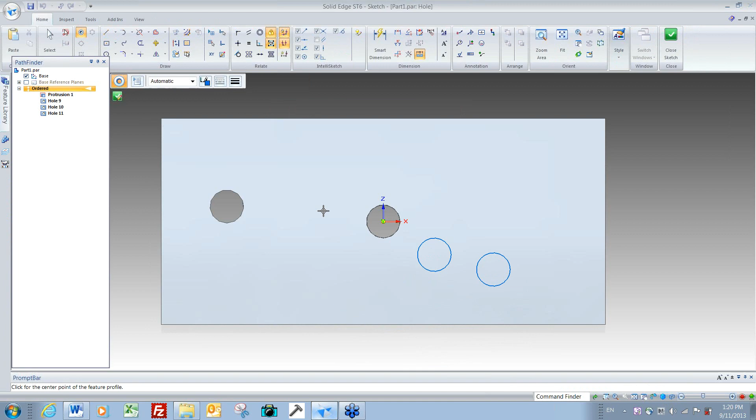Now your users today can do this. They can save, like this is a simple 1.0 hole, but it saves it locally into their custom.xml file. I'll show you what that means in a minute. Let me just commit this hole. So what that buys you is that when your user wants to create a hole again, that user can fly this down and there's that simple hole right there. But it's only localized for this user.

So if I go back to the C drive, Program Files, Solid Edge ST6, and Preferences, my local time is 1:20 p.m., and you can see that the custom.xml file has been modified. And if we look inside, you'll see that simple hole that I created.

I think it usually puts it at the bottom of the list. Again, there it is right there, simple 1.0 hole. So this is being maintained so that these holes can be remembered for the user. But again, this is local on this one user's computer, so no one else can really share that file.

And it works great for the local user because then they can come back and pull that same file. But if lots of different people are using this same type of file, they're creating the same hole over and over again, and it could be done on the network so that everybody shares the same definition.

So let's simulate how that can work in your controlled environment, in your Solid Edge administration. I'm going to go ahead and restart the administrator. Again, I'm getting the message saying that I'm using the local options.xml file. And I'm going to open my network version. This is the one that I just made a copy of onto my network. Now I'm working with the network options.xml.

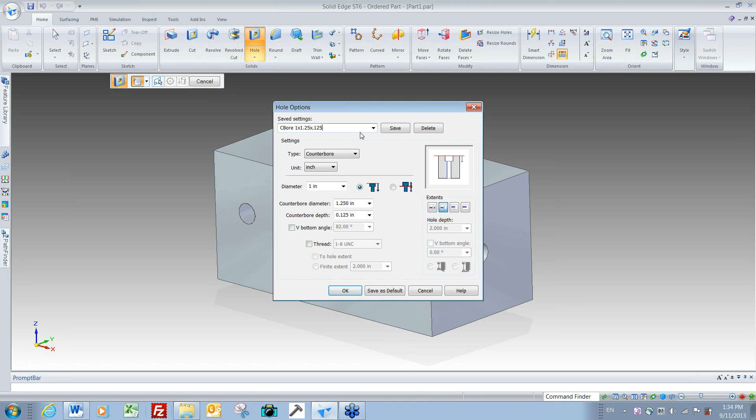I'm going to create another hole, and if I fly this list down, you'll see that simple hole still exists there, and that surprises me unless I already had one in there. I must have already had one in there. But the bottom line here is that as your users create more holes, oh, I want to go back here and save this definition. You can see it now appears on the list right there.

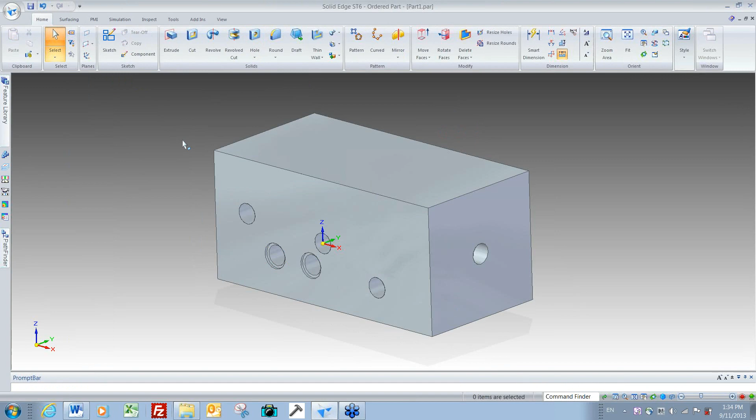So as your users begin to create more holes, standardized holes for the company, they'll be saved in the custom.xml file, and everybody can share them. Now I want to take a quick look at the custom.xml file here for you so you can see that it's been updated.

It's 1:34 local time now, so this custom.xml file was updated, and there will be a hole down in here called CBore. There's my simple hole. Should be one in here somewhere called CBore. I don't see it. But anyway, that's the way it works.

So I want to just spend a minute going through one more thing in Draft. Go to my test one draft template. Things like parts lists are another thing that administrators seem to have some issues with, trying to get everybody to look at the same bill of materials. And this is basically how it works. First off, let me put a view of an assembly in here.

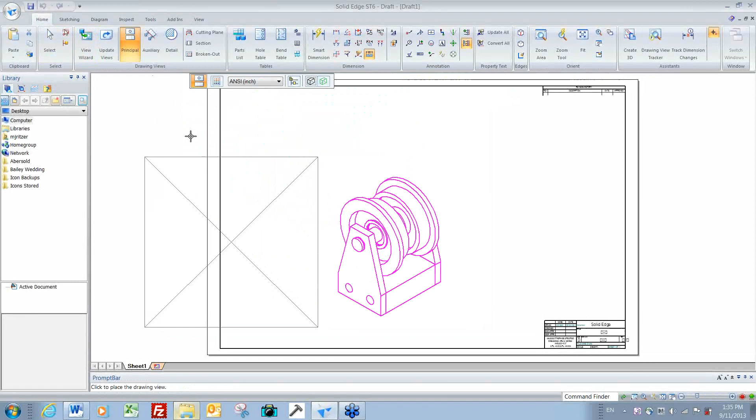Next up, I'm going to create a parts list. Now, as an administrator, you're going to create a parts list to get your standardized settings in here. Let's say that my company name is ASI, and this is BOM 1533. This is a certain way that we want a bill of materials to be saved. So if I click OK, now that becomes an item on the list that I can select. But how do we get that out to the users?

Well, that's through the reports. So if you set this all up correctly, the draftlist.txt file has now updated. 1:36 is the local time here, and that will have a list in it for the ASI BOM 1533 bill of materials. So by setting this up and using your options.xml and having everybody point to the same reports area, everybody can see that bill of material definition.

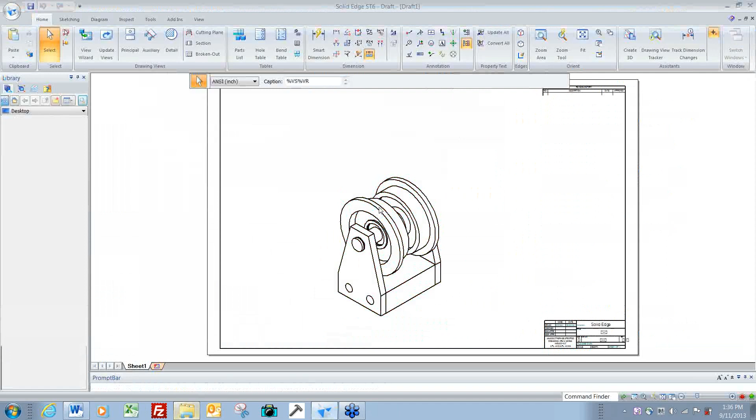Lastly, I'll give you another quick tour of another way to use this whole thing. And again, the whole thing is getting everybody to look at the same files on the network, right? So in file properties right now, under category, there's only 3 items, and this is the one that was by default typed in when the file was created. But where are these other ones coming from?

Well, that's coming from a file called propseed. And again, propseed you will find in your options, or your preferences. And in here, there's the category, and that's the category where we just were in that part file. You can see there's hardware, miscellaneous, and there's nothing under the default.

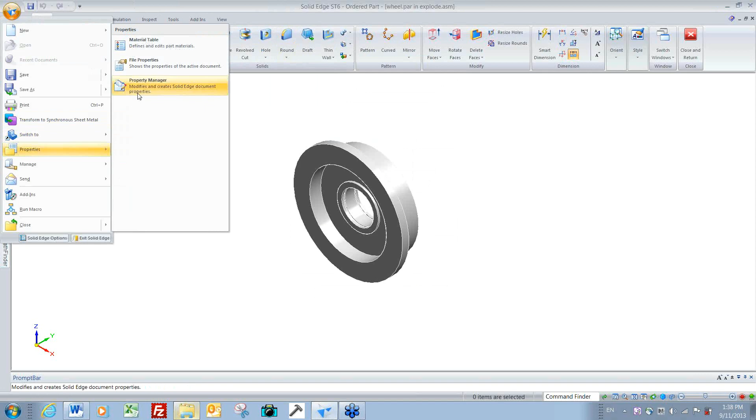So if I wanted to add software, let's say, as one of those items in that category, I can do that, save that off, and because it's a network copy, when any user comes in and does file properties, under category now, they inherit the software item for that property.

So again, the whole thing culminates in the fact that you can put all these files on the network and have everybody share them, and all you have to do is change the options.xml file for each user, and if you use the update in ST6, everyone should inherit those changes and be able to share all this data, and you'll reduce the amount of repetition in creating these multiple copies of things.